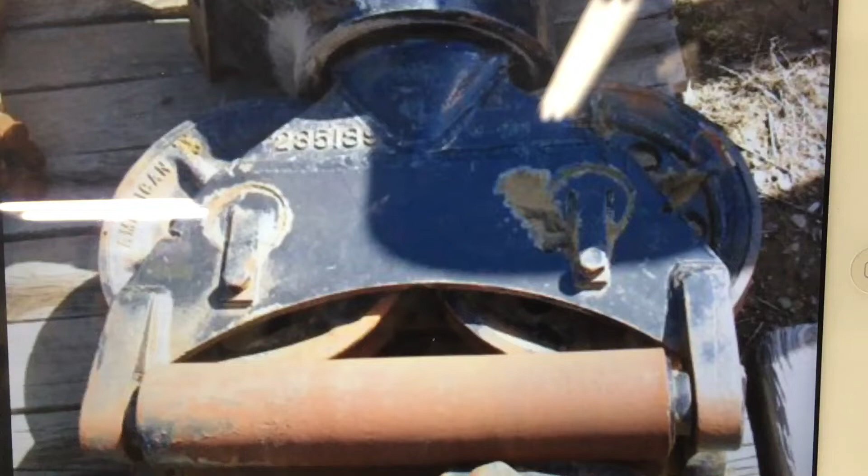I'm trying to build a Fairlead for the drag rope on my little RC Dragline. That's a picture of one I found on the internet that I'm kind of using as my design a bit. Not sure how much of the actual build process I'll show.

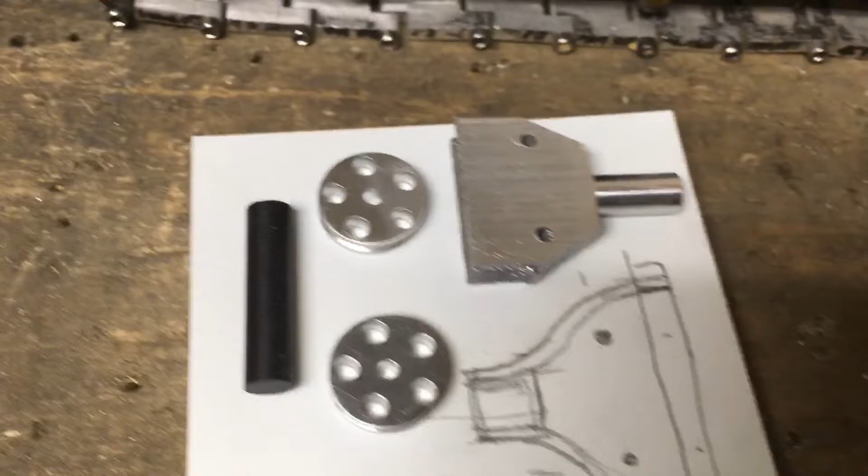It's kind of hard for me to shoot video when I'm machining some of this stuff, so I don't do much of it. I think it's interesting, I like watching it, but it's just kind of tough for me to do.

Anyway, here's a few of the parts I've got, and one of the things that I made yesterday, I'm going to try and redo it with a little different technique.

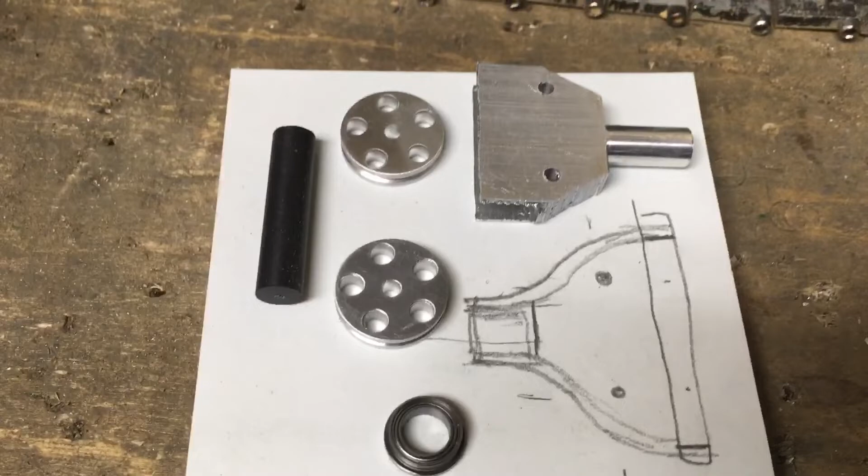You can see the two pulley sheaves there. I'd like those to be spokes, but it's so small and hard to do spokes on something like that. I just did the 5-hole on the mill.

The little black roller is Delrin, and I think I'll probably make that out of aluminum. Then I'm going to put bearings around the shaft of it.

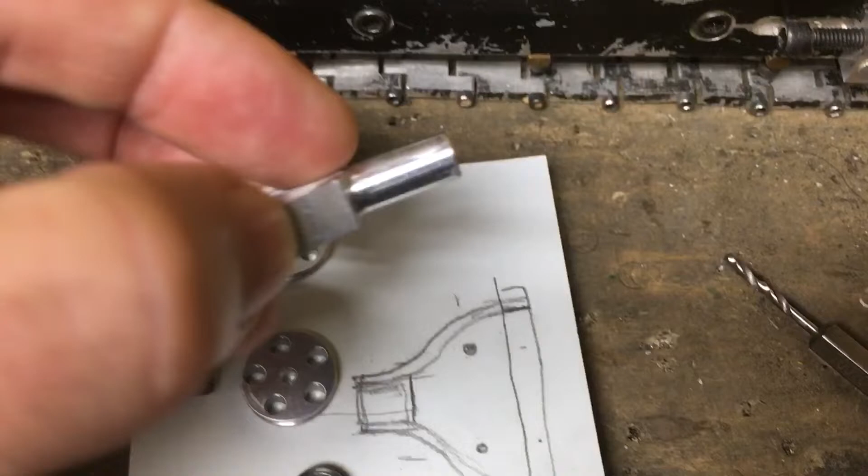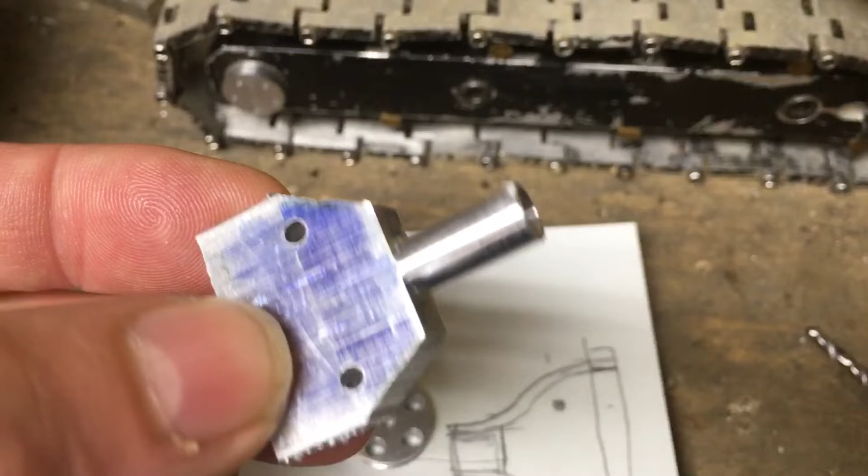This is out of one piece of stock, and this is what I'm going to redo today and change it. I was going to try to mill that slot all the way down through it, but you can see it's spreading just because it gets chips in there, and it gets too thin as I do it. But it was interesting, a learning experience for me to mill the round out of this.

I had to put the four-jaw into the mill, or into the lathe, to do that, but that was kind of fun getting it centered, and then I drilled a hole.

What I'm going to do is make this shape out of two pieces of flat stock, and then I'll be able to make this part just by itself, the round piece, so that'll be much easier to do.

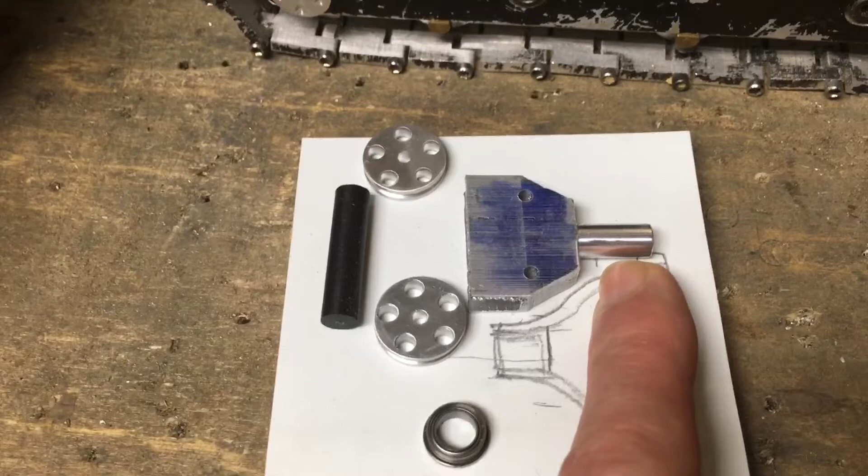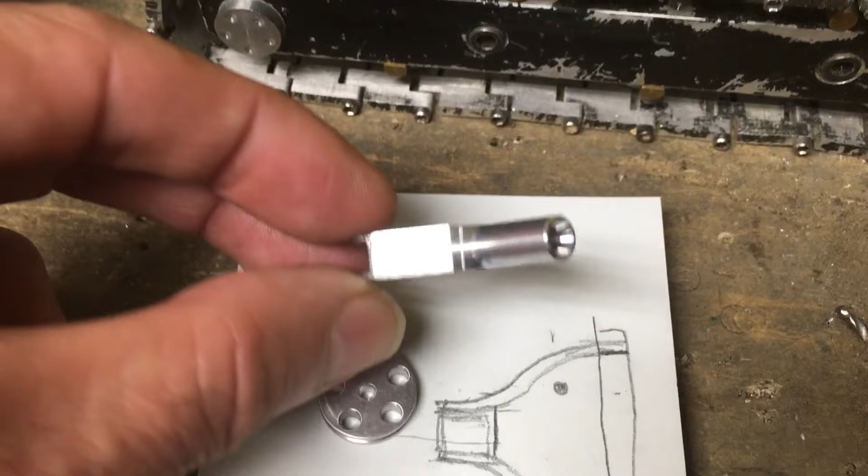And then if I screw up one or the other, it's not trashing the whole part. On the flat pieces, I'll be able to clamp them together and then drill down that center spot where the shaft is going to go, so that it accepts the round shaft.

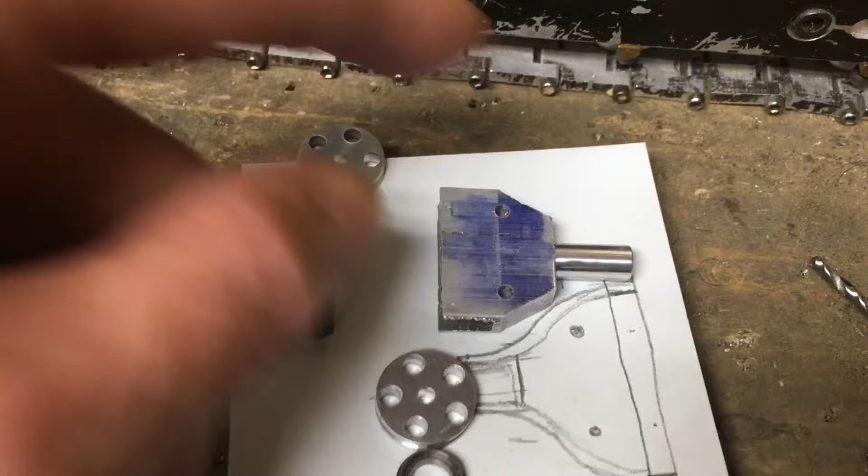Then I'll tap a few holes back here about where those are at, that was where the pulleys were supposed to center up. But I'll put a couple of small holes, probably 2-56, back there as clamps, and then bolt the two halves together around the center shaft. I'll still be able to use the bearings.

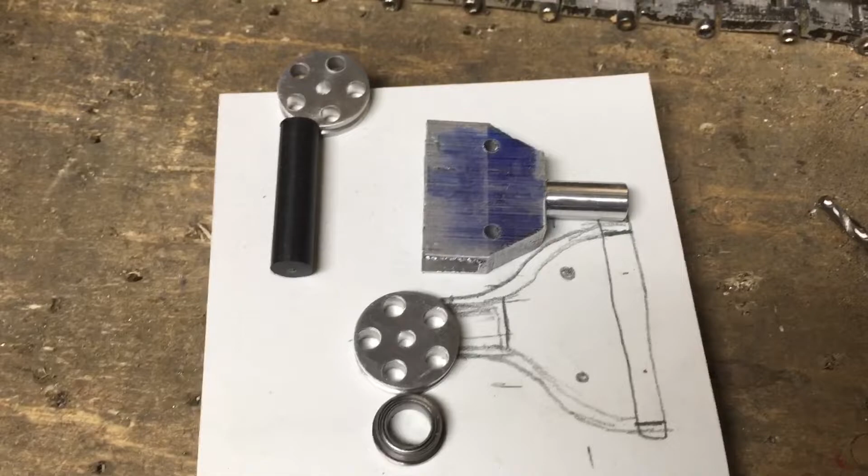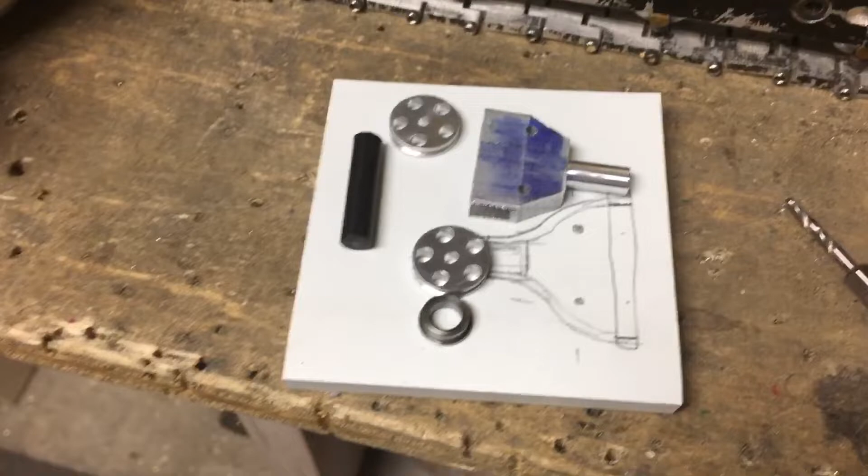Haven't done much on the RV10, and I need to get back on that. I kind of got to a stopping point where it was time to move stuff out, and stuff is still sitting there, so I can't get working on the wings until I move the fuselage out of the shop. I just kind of got burned out on it, so I haven't gotten back to it yet.

But it's starting to cool off, September now, so I'll probably get back to that here pretty quick. That's what I'm up to. See you next time.